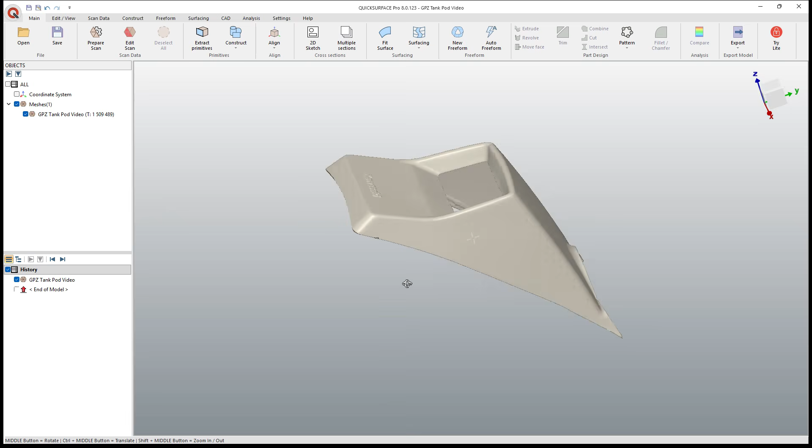Hey everyone, this is Matt with Learn Everything About Design, and in today's video, we're going to be using QuickSurface Pro to create a version of my Kawasaki GPZ tank gauge pod.

Now, we're going to start with a little bit of background on this project so you understand what we're doing and why. This is part of our GPZ build series, and this is an '83 Kawasaki GPZ 750. Back in the 80s, all the manufacturers were starting to experiment with new things. Kawasaki was one of the first to include a gauge on the tank. This was a fuel gauge, side stand switch. It had oil pressure. It had some other stuff in it.

So my plan for this bike has always been to build a GPS-based speedometer to go in this gauge pod, to also include the fuel gauge still, potentially the oil pressure light. This thing doesn't have a rev limiter on it, and when you would get over about 10,500 RPM, the oil pressure light would come on, and that was kind of an indicator of, like, you're getting low on oil or you need to shift or something like that.

Now, obviously there's a tach, or we're going to put a tach on the bike and everything like that, but it's just a sensor that I want to still include somewhere. So I'm going to be porting the oil pressure sensor. I don't really care about the side stand switch. That thing is gone. But I do want to include the fuel gauge.

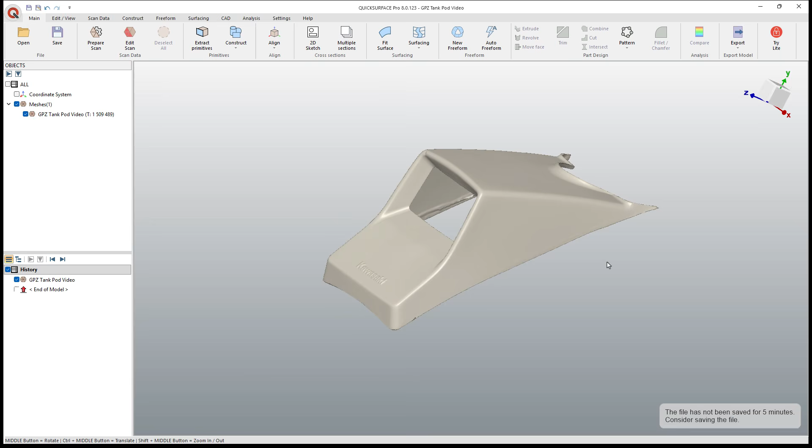And since the bike is sort of at a different angle now, when I was riding it with the factory gauge in here, it never was right, just because the tank was tipped so much further forward. So we need to correct that. We need to bring all these sensors in. The gauge that's in there is pretty big.

It's pretty bulky, but the display that I ended up getting is a Nextion display. I think it's the 3.2-inch Discovery series. And it is narrower top to bottom, but wider. And also, unfortunately, it is a touchscreen, but it's not centered. So the rectangle, the 55 by 80 rectangle, the display is not actually centered on that. So I'm going to have to work with that to make that happen.

Now, this project, unfortunately, involves a lot of different steps. So we're going to be breaking it up into many different videos and not just a single video like we have with most of the other parts. This is because I need to get all the inputs from the bike, which has not run in quite a while. So I need to do some figuring out on the resistance values for the fuel sender. I also need to get the Feather and the GPS wing for the Feather sorted out.

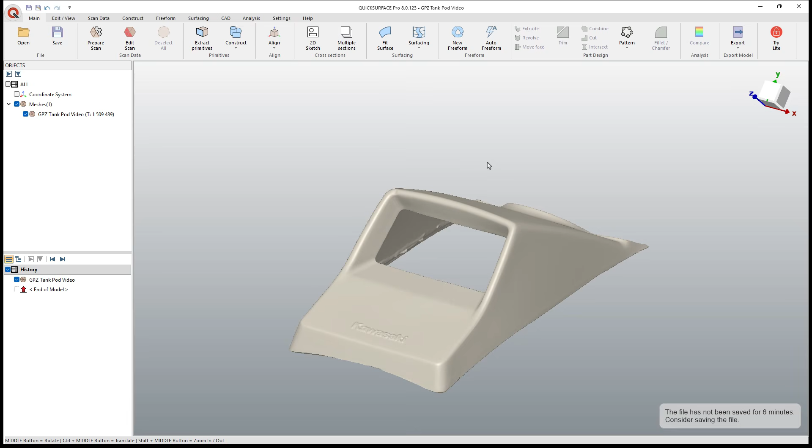I need to figure out if I'm going to try to keep the touchscreen display and what all I want to include in different gauges and things like that on the display, or if I want to seal it so that way it can actually have a little bit of protection from the elements, from the dust and the water and things like that.

So all that to say is we scanned this part in one of our recent videos looking at the Einstar 2. This has a scan on the outside and one on the inside. The part does have a gasket that was epoxied in place, so it's kind of messy on the inside, and there are a couple of holes in the scan, but we have a good enough scan here that we can replicate the part.

Now, I've actually already replicated what I needed and printed it and test fit it, and everything was fine. That's not the final version because I need to build a housing for the gauge itself, but I did at least validate that going off of this part, we can get something to work.

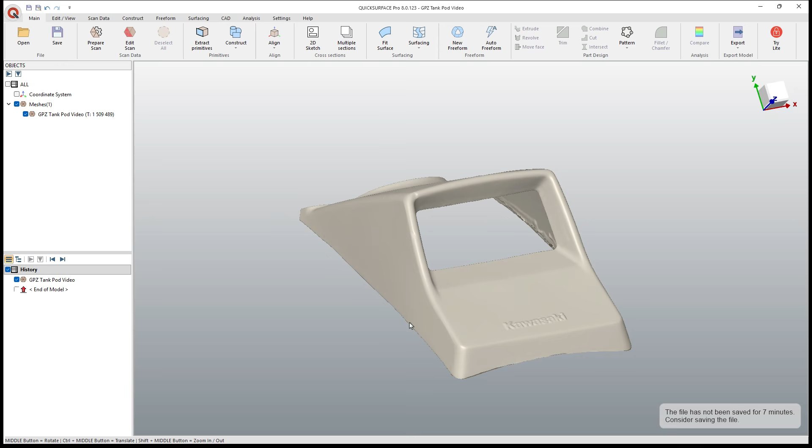There are a lot of different steps in this process that we need to understand. First of which is we're dealing with a plastic part that's over 40 years old. And it does have a broken corner, but other than that, it's in pretty good shape. But it is twisted. It is deformed left to right. So we're going to have to use some judgment, figure out what we consider acceptable.

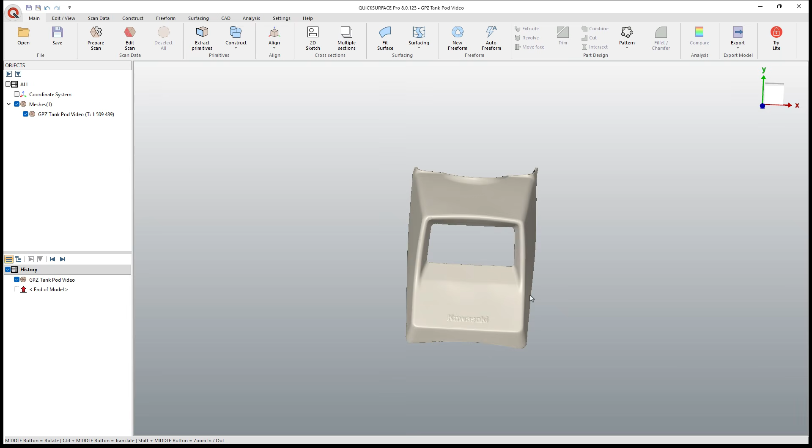Some of the features, like the little sharp parts on the back and the lip that's right here, I'm not going to build those because honestly, they're not needed. It doesn't come that close to a frame. They were just included as sort of a cosmetic feature. It's not something that I really care to replicate. So we're going to focus mainly on the intersection with the tank and then the general shape, knowing that after I design the gauge, I might actually have to make this thing a little bit bigger, but we can sort all that out later.

All right, so first step when we import something into QuickSurface Pro. Now I am using QuickSurface Pro because there are a couple of features in here that I think are helpful, and I will point them out as we go. You could do some of this with Lite or with Personal. There will be limitations into some of the features we look at. So I'll try to point those out as we go.

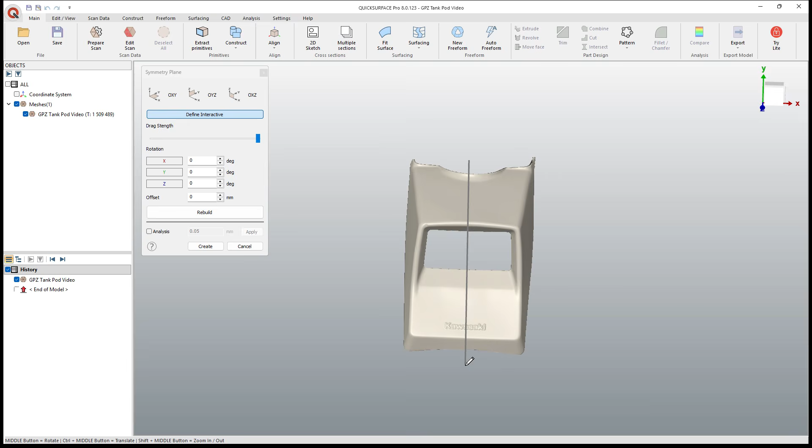So generally what we do is we draw a line, we dictate where we want that plane, and then we select rebuild. Now this is going to go through, it'll calculate, it'll try to analyze the mesh and figure out where the symmetry plane should actually be. And then once it has a good enough response, in this case, we can see the result, how that one corner is a little higher. We're going to look at the analysis.

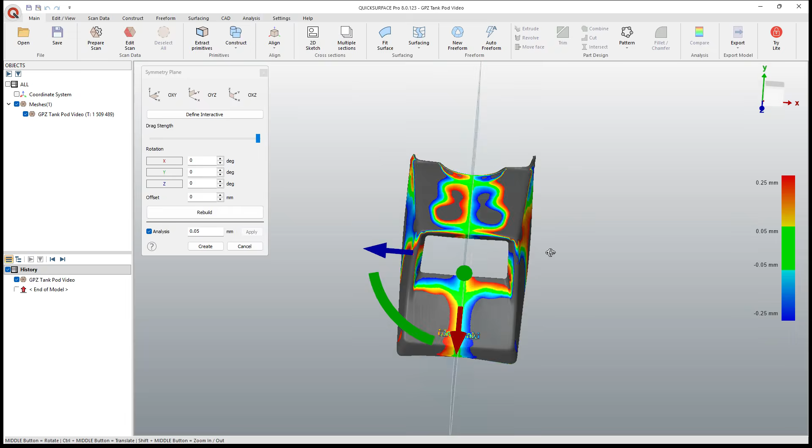And what I'm looking for here is essentially a very similar color bar left to right. Now, this is blue and this is red, which means this is low and that's high. Same thing over here, low and high. But you can manually adjust this if you want. So you kind of tweak it and try to get it closer and then rebuild it again. It'll use that adjustment, whether you rotated it or moved it around.

Also keep in mind the analysis is 0.05 millimeters, which is really, really small. If we change this to maybe a more acceptable number, 0.5, this is more realistic for this kind of part. We're not looking at a highly precise machined part, and obviously there's some noise in the scan data. That's something we have to deal with.

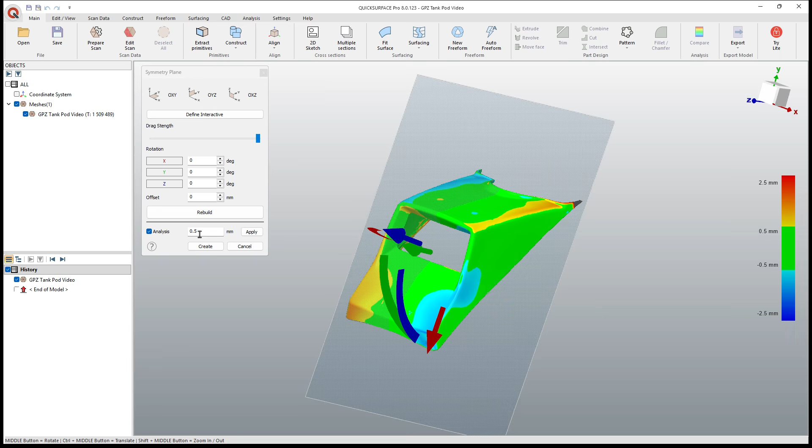But changing that analysis value to something a little bit more realistic, like 0.5 millimeter, now we can see that this is actually really close. We've got low spots and high spots here, low and there, so we can kind of see the twist. That's good enough for me, so I'm going to create that plane.

Now that we have this plane, I need at least one more that I can use to basically align this to the coordinate system. So I'm going to extract primitives. And if you are on a Pro version, then you can use this segments option. That segments option does not exist in Lite or Personal. And then I can just select this face and create a plane.

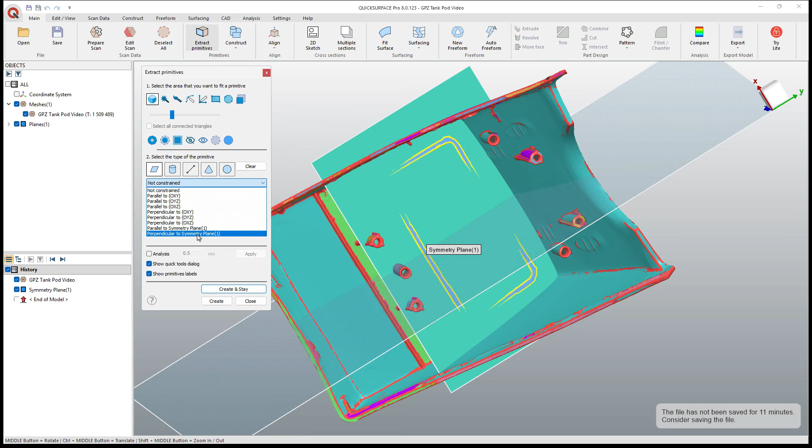Now, before I OK that, what I want to do is make sure that plane is perpendicular to my symmetry plane, and then double check the analysis. And you can see that looks pretty good. Everything's green. We're going to create that.

Now, one downside to this is we don't really have a good reference for XYZ orientation. So what I mean by that is this part sits on a gas tank and it's kind of sitting like this. The screen is pointing at the rider. None of the bosses are really pointing in the right direction. So we don't have another good reference for the coordinate system. So we're only going to use these two planes.

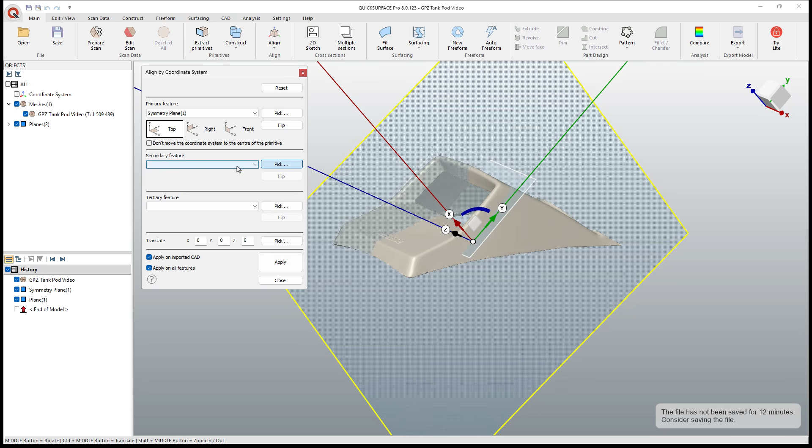So I'm going to go to align by coordinate system, starting with my symmetry plane. Then I'm going to go to my plane 1. Now I want to look at this and make sure X, Y, and Z are correct. I want Z to be pointing toward the rider in this case. And if we need to flip anything, we could do that. And then we'll apply. When we apply this, it'll apply it to the mesh and to all the features we created, which means the planes are going to rotate as well. And then we can close this.

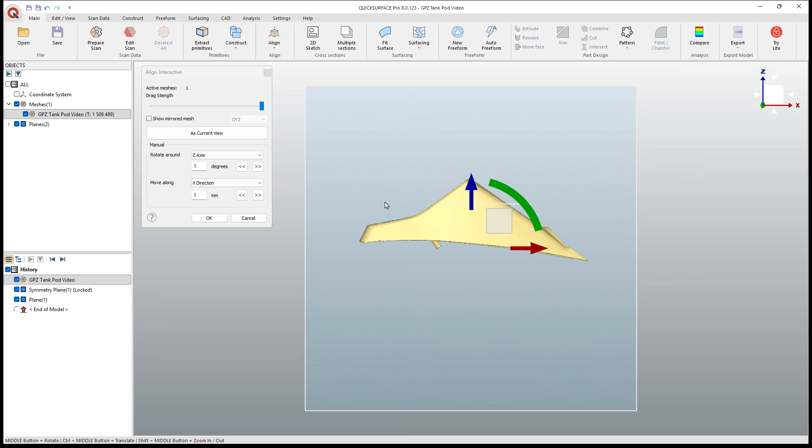But once again, if I look at this from the side, that orientation may not be exactly helpful for creating some features. So we can always go to Align Interactive, and we can rotate it until it would be roughly about how it would sit on the tank. A downside to this is there is no option to move the planes with us. So when we do that, that second plane we created is now basically meaningless. So I'm going to delete it. I'm going to rotate this around.

And I'm going to construct or extract another primitive. So once again, I'll click here, create a plane, make it perpendicular to my symmetry plane, show the analysis to make sure it's okay, and then we'll create that. I don't know if I need that. I mean, I will need it at some point. I don't know that I need it right now, but now we have that.

All right, if you're still with me, at this point, the next step for me is to change this 1.5 million triangle or polygon mesh to something that's a little bit more manageable. If this ever has to be exported to Fusion or another CAD program, we don't want to send 1.5 million triangles because it will slow Fusion down. Now, I've worked with scans up to 10 million triangles, and while doable, it's not exactly ideal. So the lighter you can make this, the better.

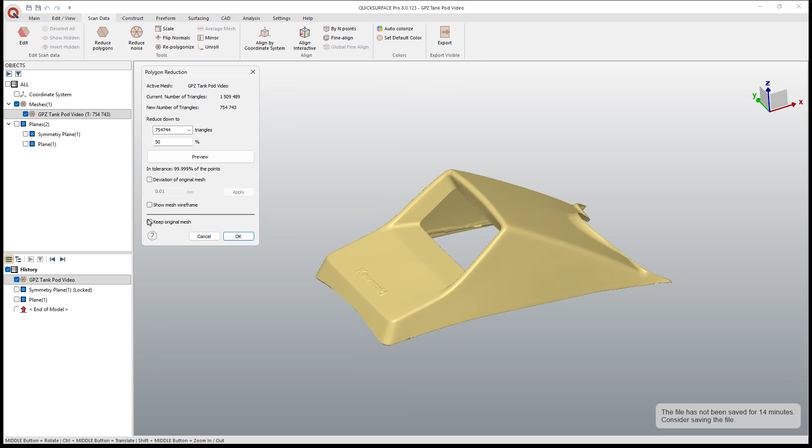So under scan data, we're going to reduce the polygons. Right now, I'm going to do 50%. We're going to preview this and check the deviation of the original mesh. You can see here, 99.999%. You can analyze it and see, well, there's really no area where it's not within that range. So we can go lower. We could say 25%. Now we're at roughly 370,000 triangles, 99.998. I'm going to go quite a bit lower, let's say 5%.

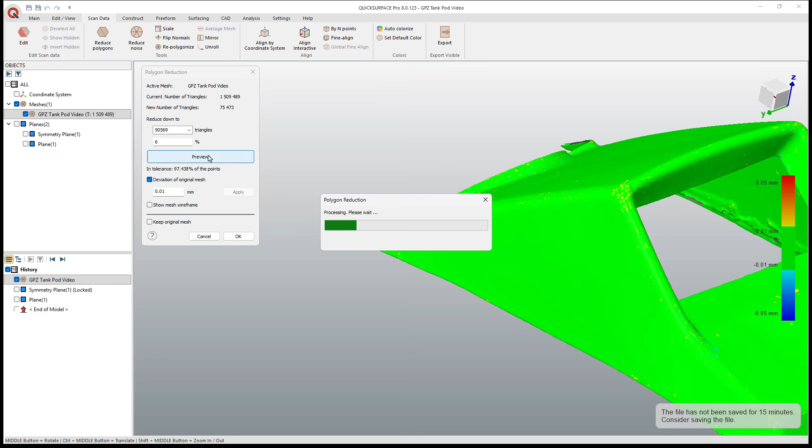And we'll take a look. All right, so now it's 97%. The areas where it's a little bit off are these corners. So you can see here, this might not be an issue at all. And so if you're okay with this, then you can run with it at 75,000 triangles instead of 1.5 million, or you can start to go up. So for example, let's say preview at 6%, we're back up to 99% accuracy. So you just have to make the decision what is okay for you.

Knowing this part is plastic and it's twisted, that 98, 99% is probably overkill, but we've gone from effectively 1.5 million down to under 100,000 triangles. I am going to keep the original mesh just in case. So I've got the original here, and then I've got what I'm going to consider the lighter version.

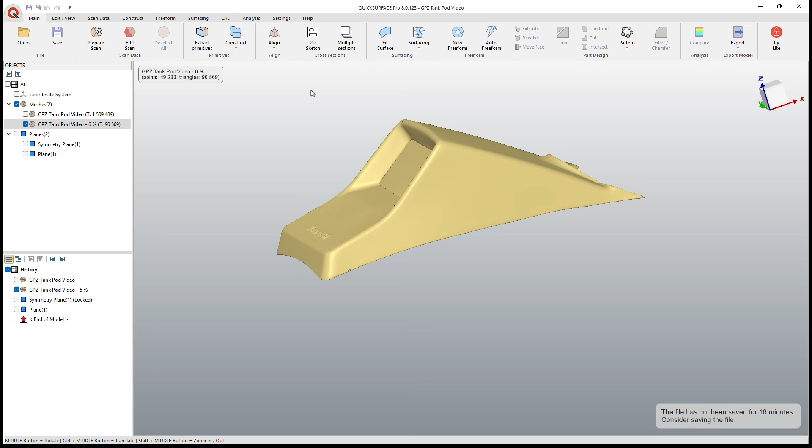But now we need to decide how to create surfaces. Now there are probably 5 or 6 different ways that we could do this. Fit surface, or using a sweep, fill surface, freeform, auto freeform, or extracting some sketches. These are all different ways that we can create this geometry. Let's go ahead and explore a couple, and I want to first start by going to my surfacing menu and selecting 3D sketch.

So the first one I want to look at, I'm going to create a path. This is snapped to the mesh. We'll create a path there, double click to end. And then I'm going to come from here. I'm going to begin coming up the mesh and double click there and say okay. So with this, what we're going to do is we're going to sweep this curve along this path, and we're going to show the analysis. This gets us pretty close.

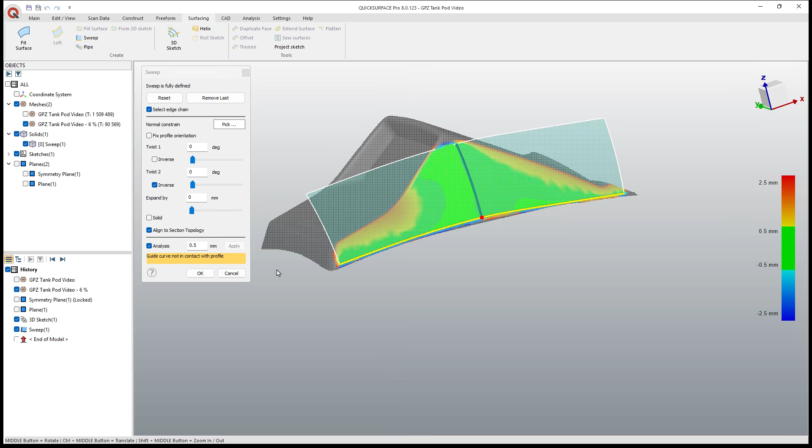You can see that it starts to fall away as it gets to this back corner and this front corner, but overall that surface is relatively close, and then we can extend it up and down if we want to use it. That's one method where we could use, let's say, the sweep tool. Generally, I would say don't use the sweep on a face as complex as this because you'll likely get a better result using other tools. So I'm going to select and delete that sketch. I don't need it. And we're going to create another 3D sketch.

The other method that we can use with these curves, and again, double click there. We're going to create a curve there. We're going to begin creating curves up here. Double click.

And we'll go down to there. So the other thing that we have is we've got what's called a fill surface. We can use this boundary. We can show the analysis. And we can even use the option to do on scan data. And so on scan data will snap to the scan data on the inside of the boundary that we created. If any of these boundaries were edges of, let's say, surfaces, then we could also use tangency or curvature continuity to control them. We're going to select OK and create that.

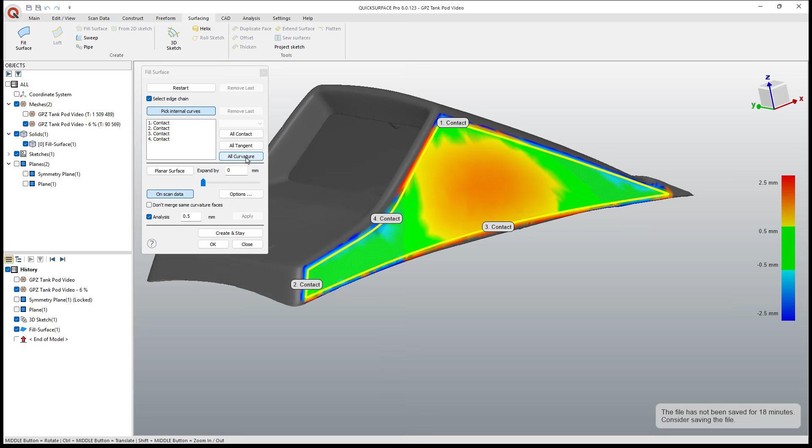And you can see it's a little bit low in the middle, but again, for the purposes of what we're doing, knowing that I'm actually going to have to change the shape slightly, it's OK for now. And then what we would do is we would select this and extend the surface. Now you can do these individually, either natural or linear, create and stay. I'm going to go ahead and take this one down below because we're going to trim them. We'll do the front edge.

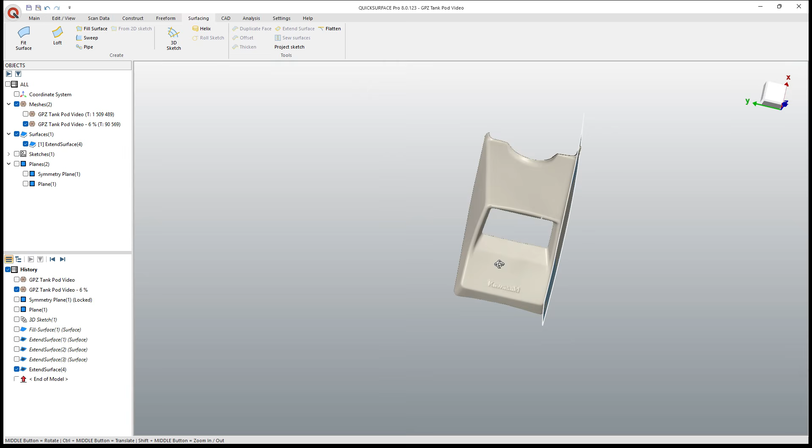If you pick the option to select edge chain, it'll grab the entire outside border, but that tends to get a little messy, especially with curves like this that are complex. But now we've got the right-hand side. Again, it's a little bit low in the middle, a little bit high in the backs, but for replicating this part, it's kind of bulged out. It's probably going to be fine.

Once again, this is a plastic part that's been in use for a long time. It's definitely seen a lot of sunshine, and it doesn't have the gauge screwed into it when we scanned it, which means that it's kind of a naturally deformed thing. We're going to end up mirroring that to the other side, even though we're going to end up making some modifications a little bit later.

All right. The next method that we have to create some surfaces is going to be with our freeform tool. So I'm going to use freeform, and I'm just going to begin creating a freeform shape on this back face here. We're going to turn on analysis. I'm going to select this inside edge here and hit S, which will split it in half. Do the same thing over here. And that looks pretty good.

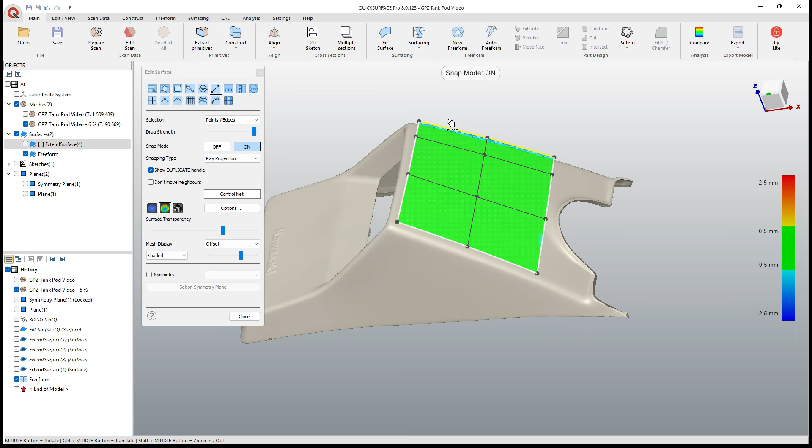Then I want to take extrapolate, noting that snap mode is on currently, but when we extrapolate, it won't snap to the mesh by default. If we start to move any of these, it will. So you do need to be careful here. A little bit low in those areas, but overall that looks like a pretty good match. So we can say, okay. So now we got a surface for the back.

Once again, we are going to make our own symmetry. So we're going to be trimming this stuff near the middle and then loft between them. But now we've got that top surface. On the front area here, we can use the fit surface option. Once again, on a Pro license, we've got segments. We can adjust this until we get that front as a single color. Click on it and create our surface.

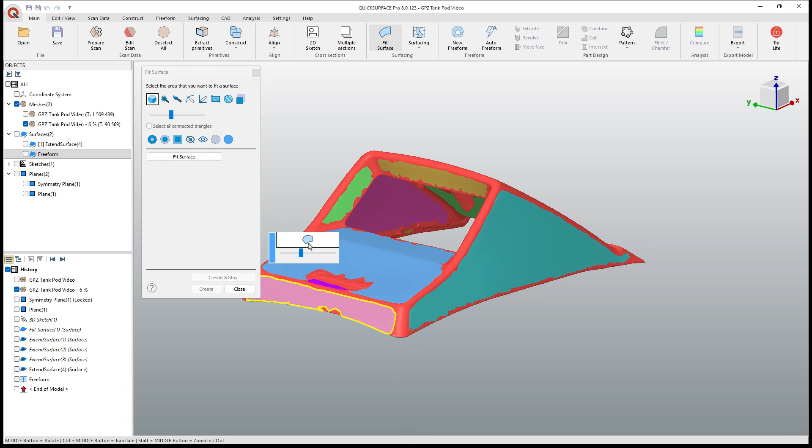You can always turn on analysis to see how close you are. It looks pretty good, and we'll create it. If we need to, once again, you can select these and extend them. I'm going to go ahead and just pull this upper section up, and I'll pull this lower section down, and we'll say okay. All right, so now we've got the side, which will mirror over. We've got the top. The next thing is to create this front.

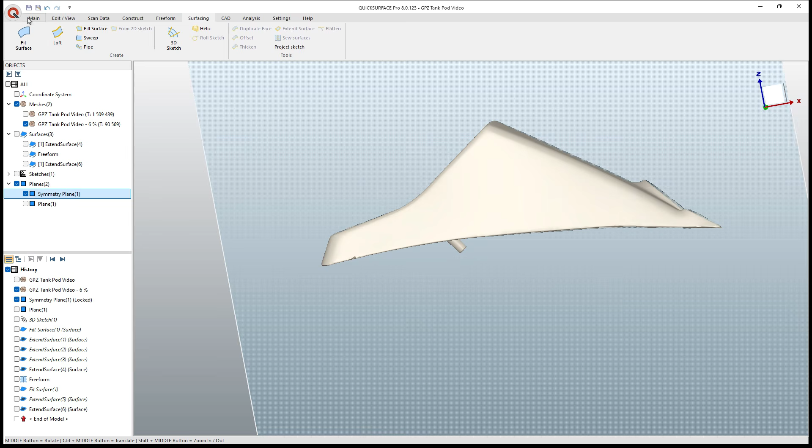Now remember, the gauge opening here is going to be different. We're going to have to create a new gauge opening. So I am just going to replicate this side profile shape. So I'm going to bring back my symmetry plane, create a 2D sketch. We're going to pick our symmetry plane. And then I'm just going to create this with lines. So I'm just going to come down to where I think the corner is roughly, and then I'll come forward.

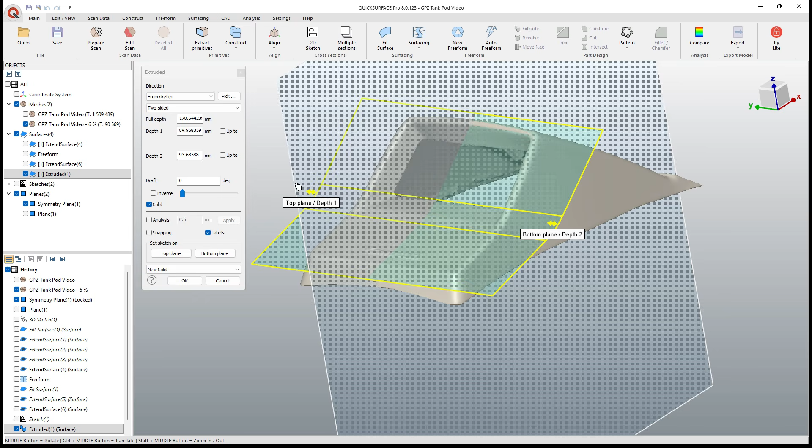And then I want to go to a corner treatment. I'm going to do a fixed fillet size. When I do a fixed fillet size there, it's going to add the dimension for me because it's automatically adding that dimension. So I can adjust it after the fact and get it as close as possible. So again, that looks pretty good. We'll say extrude, pull that out, and I'll hide the symmetry plane.

And then I want to take this surface, the extended surface here, and we want to mirror it to the other side. I'm going to use my symmetry plane. We can turn on analysis if you want to see how close it is. Again, not too bad. Again, a little bit of a high or a low spot right in the middle, but overall that looks okay. So now that we have all of these surfaces, we can select them all and use trim. Now there is an automatic trimming feature if you are on the Pro license.

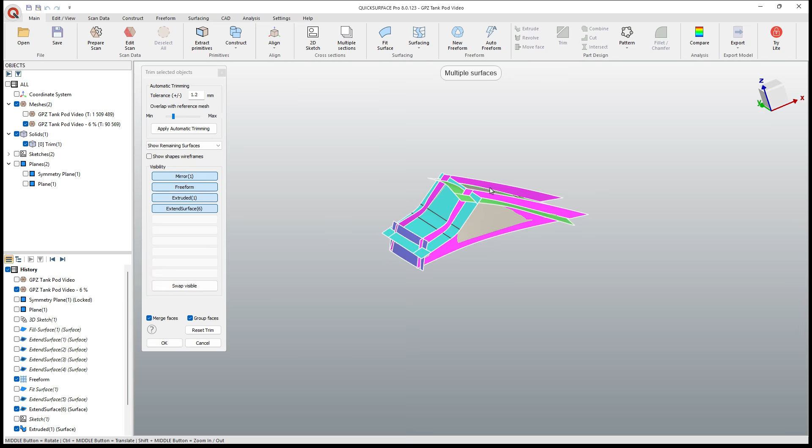As soon as we get too many surfaces and as soon as it gets a little bit complex, I've actually had some issues crashing my system, probably running out of RAM. So I generally manually select these. It's just a little bit safer for me because I haven't saved the design yet and I don't want to run into that issue. So let's go ahead and get all those corners and that corner as well.

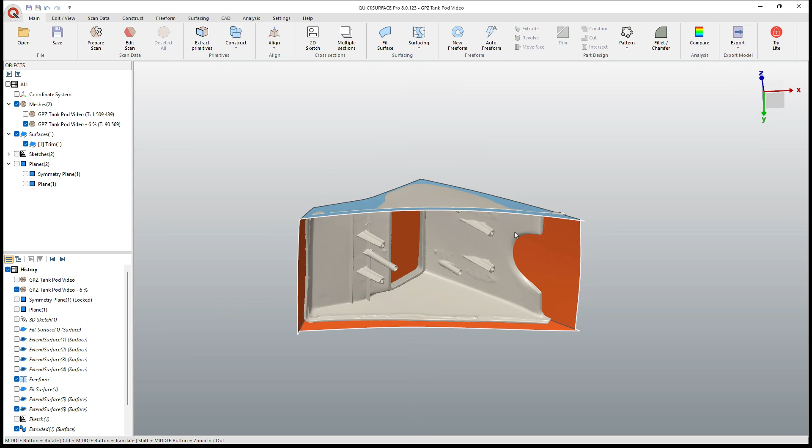All right, merge faces is on, so it's going to join this all into a single surface. All right, well, that's the basic shape. The next thing that we need to do is we need to trim the bottom and also trim the back, so the opening for the frame. While we don't need to necessarily have this feature here where it kind of bumps up, we could create it. Again, it's really just a cosmetic thing because it's nowhere close to the frame on the bike.

And so it's really like, I don't know, 2 inches away, 50 millimeters away. So it really doesn't need to be there. So I'm not going to worry about it for what we're doing. But now I have to figure out how to cut the bottom shape. And so again, this is twisted. You can see that side's a little bit lower. So we're going to have to sort of make a decision how we want this to work.

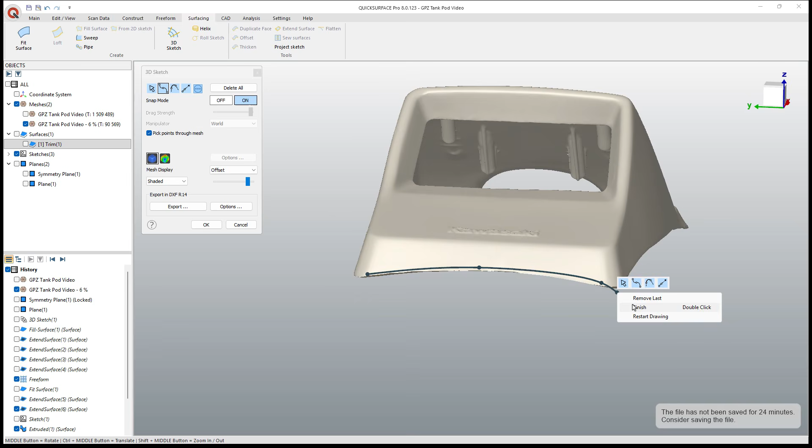So what I want to do is go back to surfacing. I'm going to create a 3D sketch on the front of this face. And we'll finish that. If that looks pretty good, what we're going to end up doing is creating a surface, and then we're going to move that surface to the right location. So I just want to roughly match the shape. I say roughly because it's not a perfect scan. That corner is omitted a little bit, so I just want to get it close.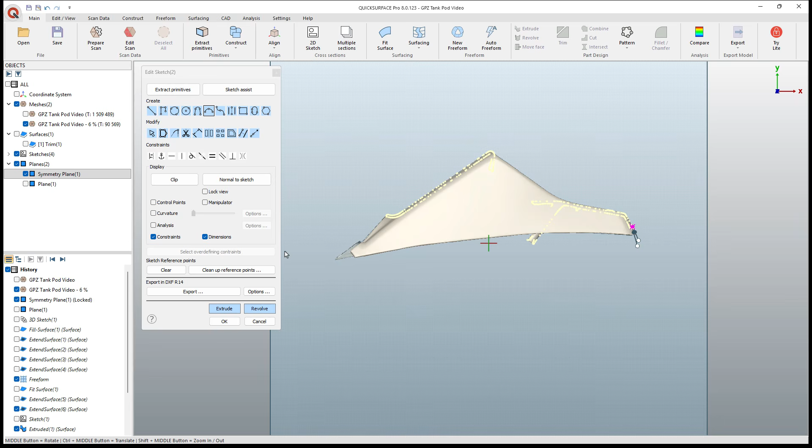We also have extrapolate, so we can take these endpoints and drag them out. If we're happy with it, we'll say okay. And then we want to create a 2D sketch on the symmetry plane. So we'll create a 2D sketch, pick our symmetry. And now I need to create a curve that matches this one here. This one is actually fairly close to just an arc. And so what we can do is bring it over here. And again, just try to get it close.

Remember the backside, you can kind of see it here. The backside's a little bit higher because this thing is twisted. So that's about the difference between the two. And then I'm going to move this up. So I'm going to do this with offset. And where that pink dot is, is where the curve we created is. I'm not worried about snapping to it for right now. I'm going to turn the original one into construction. And then we're going to say okay.

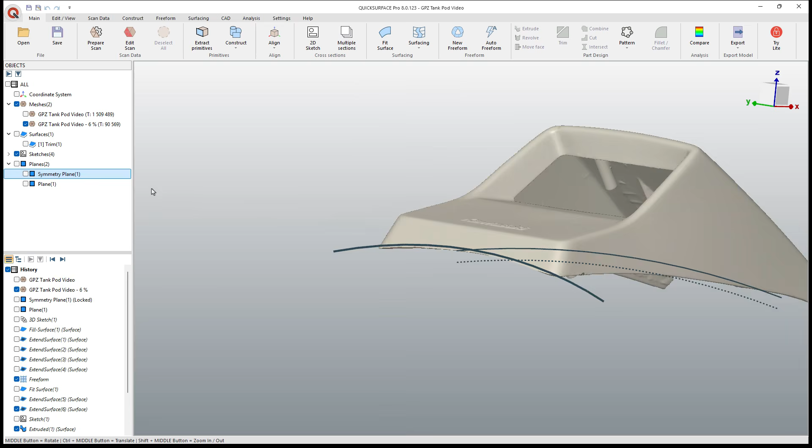So now on our surfacing tools, we've got sweep. I want to sweep this along this curve. It's going to tell me that it's not in contact with the profile, but it's still going to let it happen. And it actually looks pretty good on all the sides. We'll say okay. And then we'll bring back our other surface here. All right, so we'll select both of those. Go to trim. And I'm actually going to remove the inside completely here.

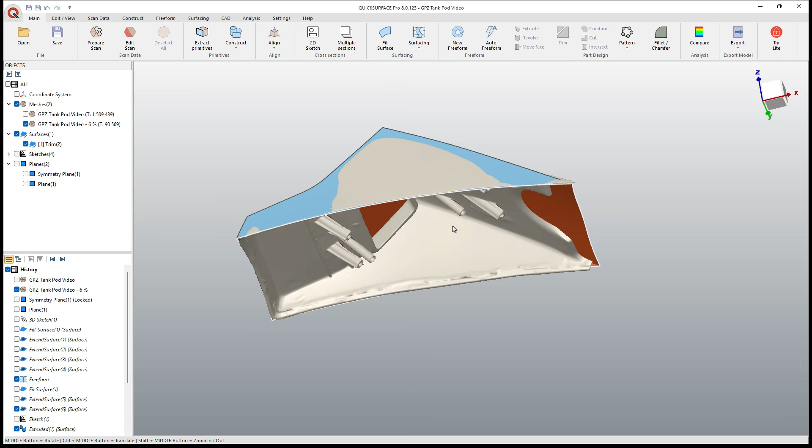And we'll say okay. Once we thicken this thing into a solid, I'll probably recut that bottom edge. But for right now, I just want to work with it in roughly the right orientation. The next thing that we need to do is sort of cut out for this shape back here. Again, it doesn't need to be perfect. So I'm not extremely worried about matching that shape. It could probably even go straight across and still fit the bike just fine, but we still want to try.

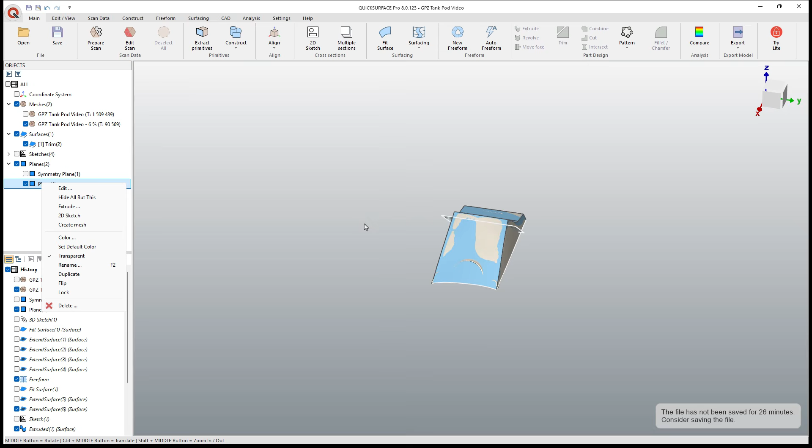So what I want to do is create a plane, and under construct, we've got plane from current view, plane along path, and all these different options. So what I would say is if we take a look at, let's say, this plane right here, what I want to do is create a plane that's probably perpendicular to that one. So we're going to select that plane, go to construct, and then we're going to say plane.

And actually, you know what? We could probably just cut it from the top. That would be a little bit more simple. We can define it interactively. We can rotate it to an axis or anything like that. But honestly, cutting straight up and down is going to be fine for us. Why make extra work when we don't need to? All right, so let's create a 2D sketch. We'll create. I'm going to hide the surfaces.

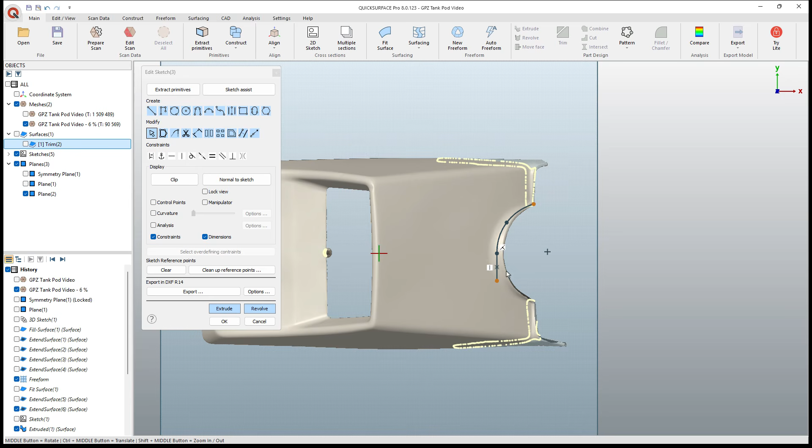And now I want to basically create this cutout. Because we don't know exactly where the symmetry is in the shape, here's the origin. I'm going to make essentially a line there. And then I'm going to create a tangent arc from there down to, let's say, there. That point right there, that intersection, we can click on this and make it tangent. This one that's already vertical, construction. And then this other line here will kind of come down at an angle, and then we'll come out this way.

I want to do a little bit of a fillet in the corner, so we need a corner treatment. This is going to be too large. So probably 5 millimeters is going to be better. So let's reset that to 5. And I want to do the same thing to that corner as well. So we'll set this one at 5.

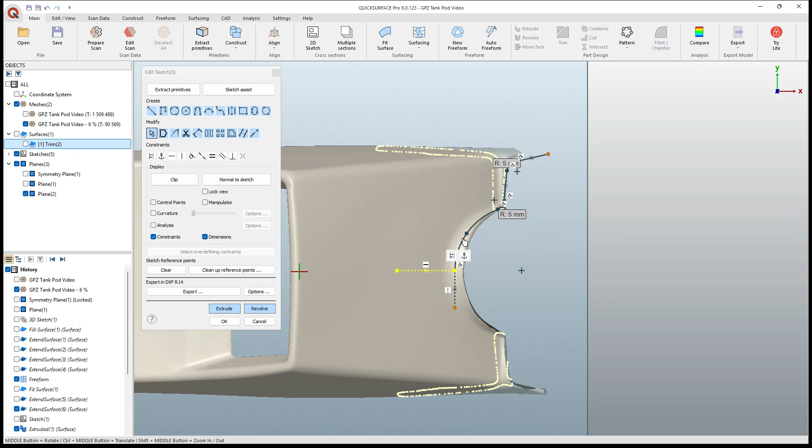And we need a line for the mirror. So that line is going to be construction as well. So we want to select that construction line, and then we want to select all of these curves. So I'm holding down Shift, grab all those, and we'll need to have a construction line in the selection, and then we can use the mirror selected entities option.

We're going to extrude that. Make sure it goes all the way through the surface, hide our plane, and bring our surfaces back. I don't need to see the mesh right now either. All right, everything looks okay. We'll select both of those and trim.

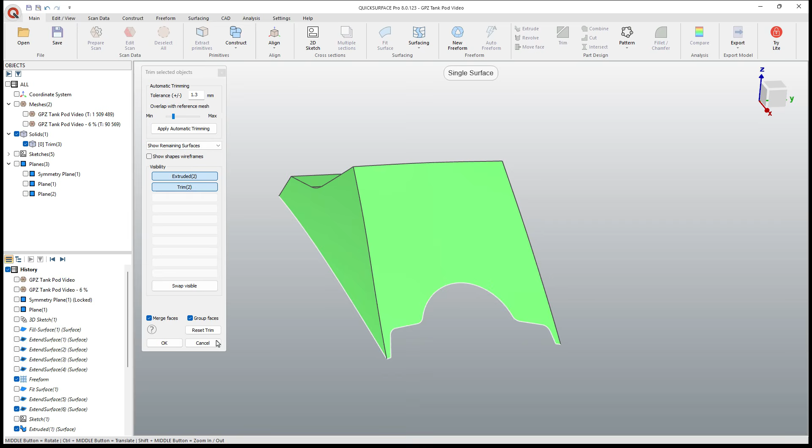All right. The next thing that we can think about doing is either rounding the corners, or before we get that complex, we can split this thing and mirror it so that we know that we have perfect symmetry. And honestly, this front face right here and this back face are the only two that are potential problems. This side and that side were mirrors of each other, and this was just an extrude, so left to right, it's fine.

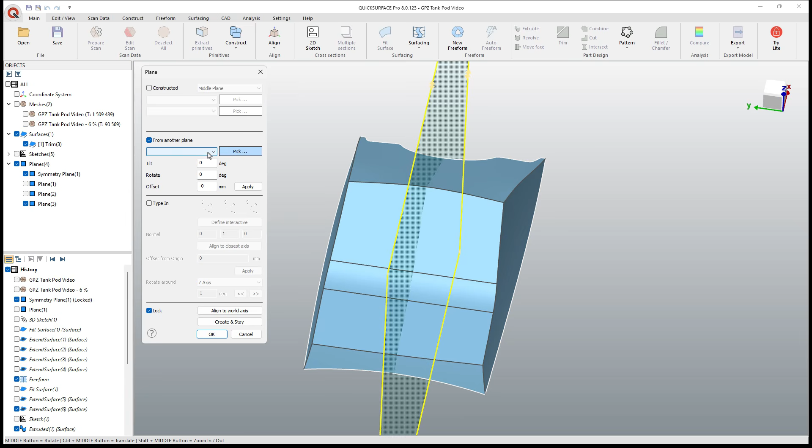But in order to make sure that this thing does actually have true symmetry, let's take our symmetry plane and create an offset plane. So we select plane, and then we'll do from another plane, pick our symmetry plane, and then just pull it off to the side. I'm going to go about 11 millimeters and say okay. So now we'll select our surfaces and that plane, and then we can trim everything off on the other side.

Now we can use our symmetry plane to mirror this entire body. So once again, we'll go back to our CAD tools, mirror, and we'll pick our symmetry plane and we'll say okay. Now that we've got both sides, we can loft between them. So we'll select loft. We're going to select our curves. Again, we haven't added any fillets yet, so this should be fairly easy.

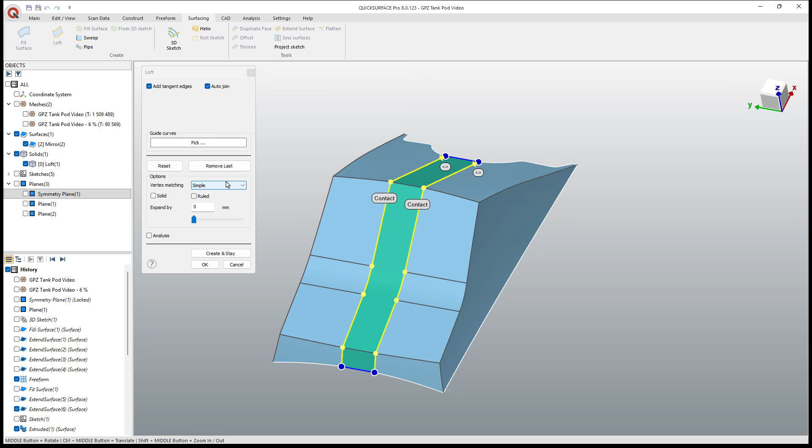And we want to make sure these are tangent so that it does follow the curvature that we cut on the front. It does follow the curvature on the back, and everything is smooth across. You can, again, turn on analysis if you've got a mesh visible and take a look. And there we go. That is our basic shape. Now that we've got the basic shape, let's go ahead and add some fillets to it.

So this is really handy for us to think about the order of operations. For example, this fillet right here, originally it blended into the shape. Again, we're not doing that. But this fillet right here and the fillets on the front, those were likely added before. And then this one around the gauge kind of rolls all the way around.

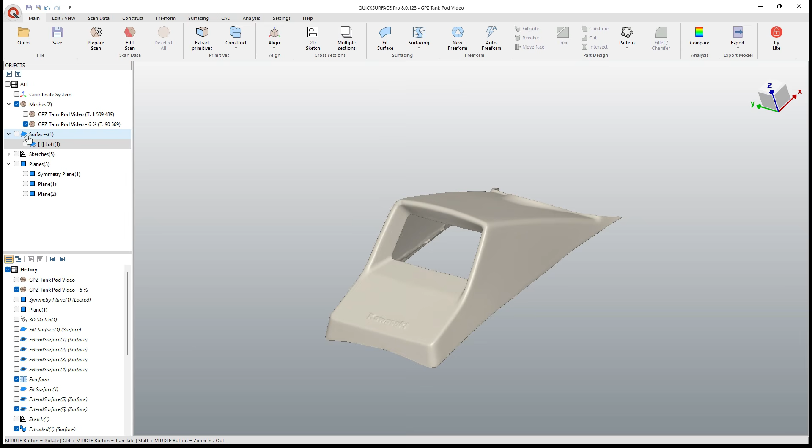So what I want to do is add a fillet to this edge and this edge, turn analysis on, and then go down to where it's green, or the most amount of green there. We'll create and stay. We'll do this on the front edge. Again, analysis is still on, so we'll go until it's mostly green. The scan itself or the part is a little bit twisted, so I'm going to focus my attention on the original side because that's where I based everything off of. And we'll create and stay.

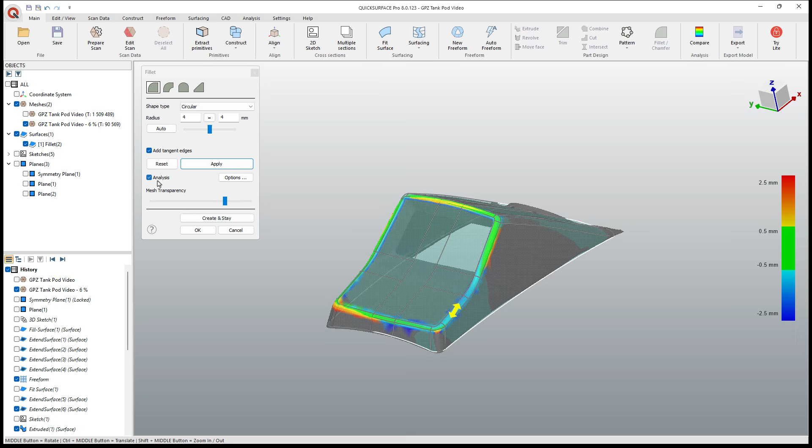And then this one here, we want to start dragging that until it's mostly green. Again, I'm looking for everything that is on this side because the part is twisted. So I want this to be green down here. That looks okay. Now, if you want to, you can use standard numbers. For example, if this is likely a 4 millimeter fillet, using those round numbers is not going to hurt anything. And then we'll say okay. So now that is the basic part. Obviously, we need to create the opening for the gauge.

You will have to decide when you're doing stuff like this if it's easier for you to do here inside of QuickSurface, or if this is something that you would want to do in a CAD program, depending on how you want to define it. For me, I always forget to save, so I'm going to go ahead and save this. I've done a lot of testing on this part, again, for the 3D printing and so on, so I'm just going to carry that naming convention.

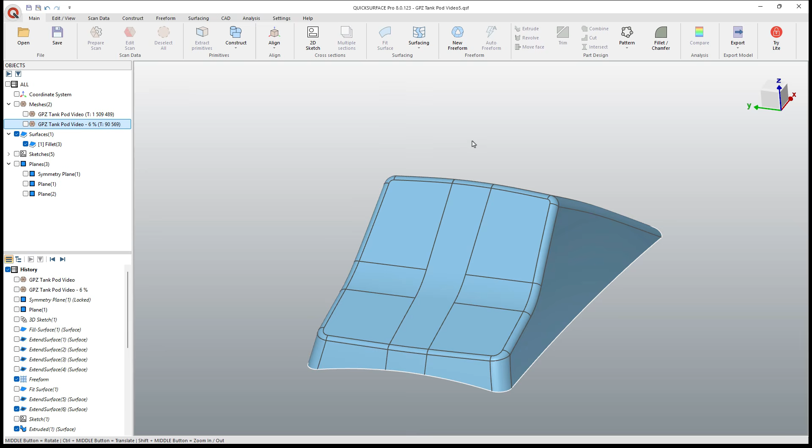All right, if you're still with me, this took roughly about 20-25 minutes. Doing it without narration probably takes about 10 to get to this stage, maybe faster. If you've done this part multiple times, you could certainly do it quicker because you don't have to experiment. But I think overall, this is a pretty good result relative to the original. It matches the shape. Somebody would see this on the bike, and unless they were an expert in the Kawasaki GPZ, they would probably never know it wasn't a factory part.

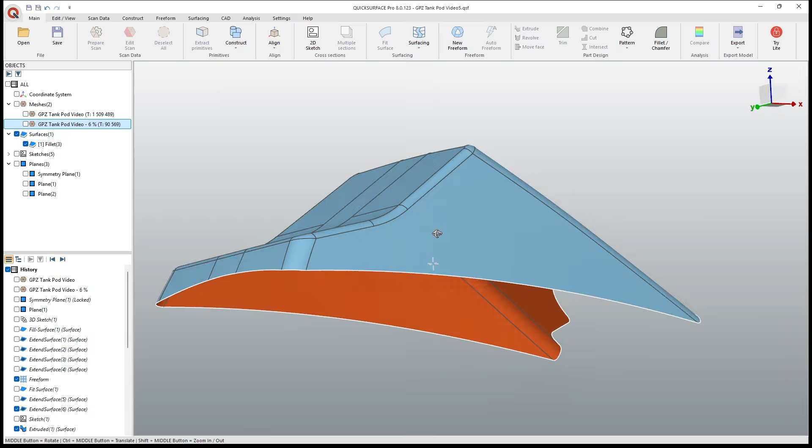But now we need to make the opening for the gauge. The way that we're going to do this is I want to essentially create the profile on that face, and I do have that plane that we created, so we're going to start by creating a sketch on that face. And because the part is symmetric about the origin, I'm going to start with a vertical line. This is just going to be a vertical reference line. I'm going to convert it to construction. Now I need to create a rectangle that is 55 tall by 80 wide. This is going to be the opening for the physical LCD.

Again, this is likely going to change because downstream, I need to account for various things that haven't been designed yet. I need to design a PCB that's going to hold the feather boards as well as a voltage regulator. The voltage coming from the bike needs to be regulated down to 3.3 volts or 5 volts at the highest. And it also needs to be sort of smoothed out and conditioned. So there'll likely be some capacitors in there. I also need to account for all the other inputs: the oil pressure, the fuel gauge, anything else that I might want to include.

Obviously, the GPS speedo is all going to be on board, so there's no speed sensor or anything like that that has to happen. But because of that, I'm going to actually export the surface before I actually cut anything out, or at least a duplicate of it. But for right now, I want to make that rectangle. So I'm going to go to a rectangle, and I'm going to start by just dragging the rectangle out. I want to add a dimension. It's going to be 80 millimeters wide, and it's going to be 55 tall. So we can kind of see what we're working with.

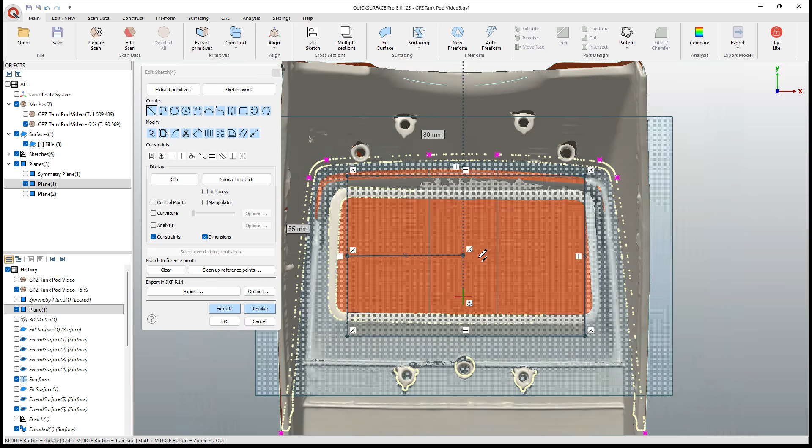And then if we take a look at our line, we've got these midpoints here. So I'm going to drag a line out to here, and let's zoom in to make sure we're getting it right. A line to there and out to the midpoint. These lines right here need to be horizontal. So this one horizontal as well. And then I also need them to be equal. So I want to select both of these and make sure that they're equal lengths. That will center my rectangle left to right. They also need to be construction because I don't actually need them. So the rectangle is centered left to right, but it can still move up and down.

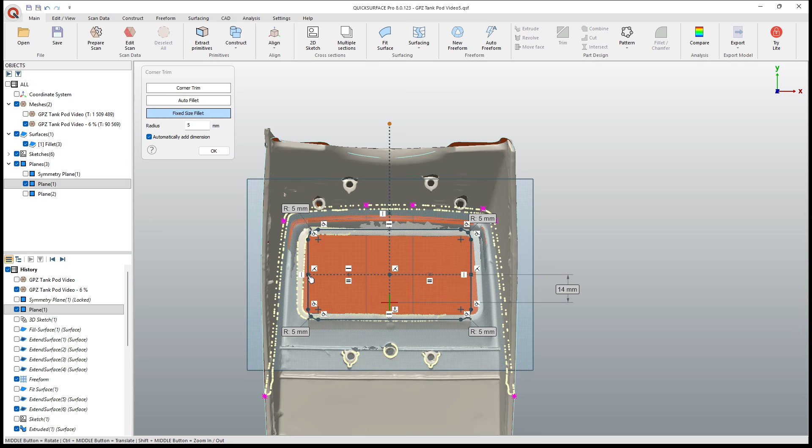And I need to decide where I want this to be and then apply a dimension. So let's say from the origin to that point, let's just come up with a number. Let's just say 14 millimeters. That's relatively close. When we begin to use these curves for, let's say, a loft, it would be really helpful if there was a consistent fillet on the corner. So let's say 5. As we do this, it's going to shift around, but if we added constraints to everything else, the equal constraint, horizontal, going from the midpoint on the left to midpoint on the right, it should work its way back into the right orientation.

It is a good idea to double check that your dimensions from top to bottom didn't change, and you can see here that they did. It's now 45 when it should be 55. And then from left to right, it should be 80. It adjusted because we started to add these fillets that ended up dropping it down 10 millimeters. Part of this depends on where you place those dimensions. If you dimension the lines, they're actually getting shorter, so you will end up reducing your overall height based on the radii that you use. I'm going to say, okay, this is the starting point for the loft. Before I get any further, I want to export this solid, or the surface, I should say. So I'm going to go to this Q menu. I'm going to say Export Model.

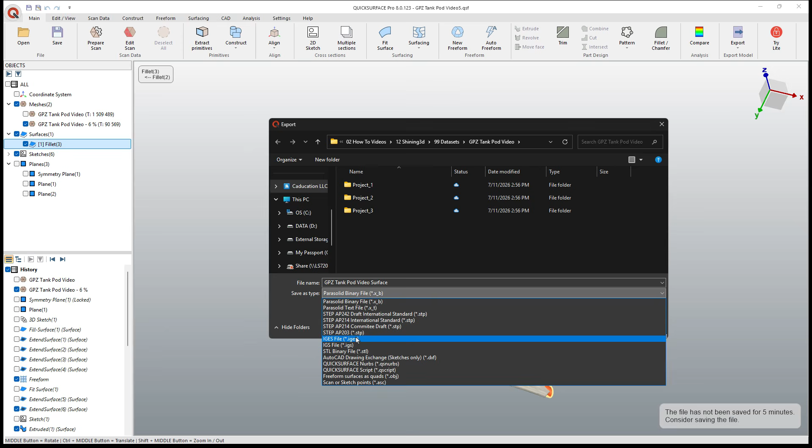And I'm going to go ahead and call this a surface. It can be a parasolid file. It can be a step file. It can be an IGES file. It really depends on what you want to do. There will be some cleanup that has to happen after the fact. So, for example, you may need to stitch all these surfaces back together to make one single surface. That's, again, completely fine, but now at least I have that model that I can use.

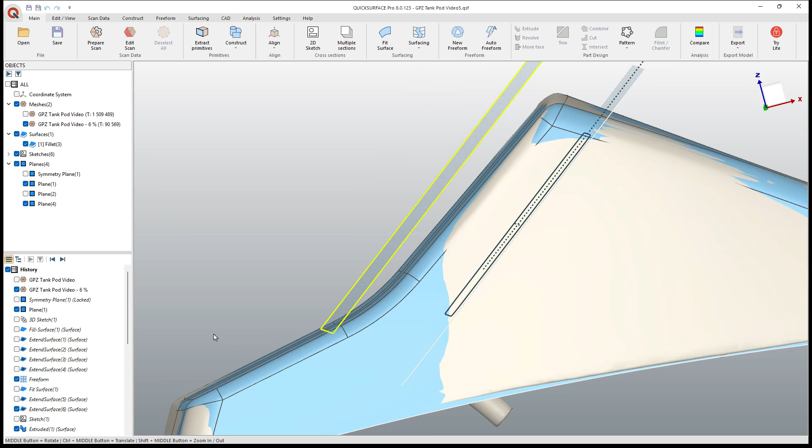The next step is for us to create an offset plane from this plane here. So again, construct plane from another plane. It's going to be plane 1, and then we need to pull it where we want it to be. I want it to stay relatively close to this face. And basically what I'm going to do is I'm going to loft out to another shape. So I'm going to say okay, and then we'll create a sketch on that plane.

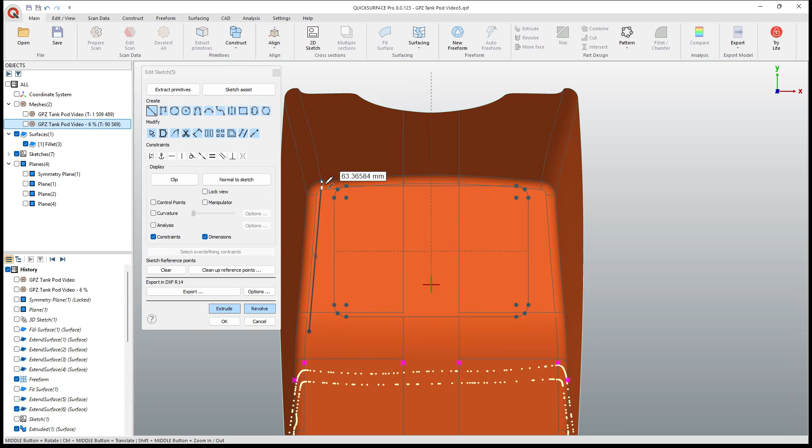If we need to, we can rotate this around, go normal to sketch. Yeah, I guess it's going to look at it from the backside. That's okay. All right. So now let's hide the mesh and let's focus on our surface. So right now we're going from this shape out to essentially this shape right here. So we need to kind of match this. I'm going to do it with lines, and we're going to come, let's say, up to here. I'm trying to stay roughly parallel. This isn't a straight line, but close enough is going to work.

And then I want to create an arc. Actually, you know what? Let's do one more thing first. Let's create a vertical line that is construction. And then we can select that construction line and this line, and then we can use mirror. So now if I create an arc, I can go from that point to that point and create that. On the bottom, this can be a straight line. It doesn't necessarily have to be an arc.

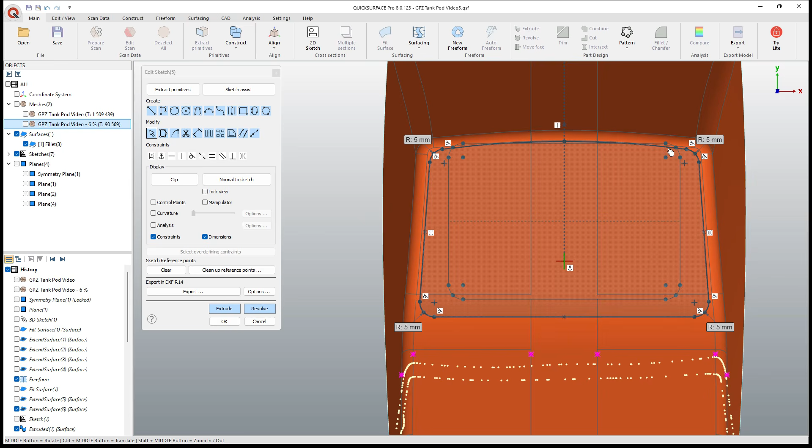And then we likely want to do some corner treatment. So 5 there and 5 there. Because there are no dimensions or constraints right now, it's not going to kind of go crazy, but you do still want to apply these rounded corners. And the main reason is because if we're transitioning from one shape to another, we want to make sure that we're using those sort of rounded edges.

As I look at this, I think that I actually want to move this one down a bit lower. We can do that by going back to the last sketch, Sketch 4, selecting edit. And instead of 14, let's change this to 13. Actually, let's go down to 12. And so basically what we're doing is we're shifting it down. We can see the next sketch, and we just basically want this to be inside of that arc. I know it's hard to see, but we'll get there.

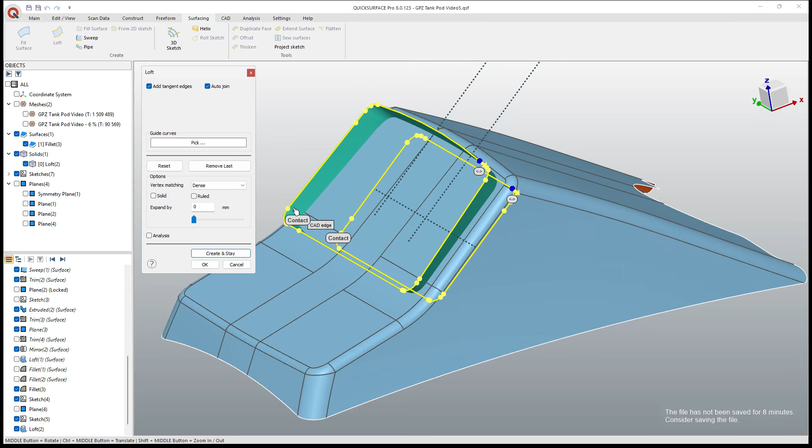All right, surface, loft, we're going to go from this curve to this curve. It's likely going to want to twist. If it does twist, the best thing that you can do is you can change the vertex matching. Let's hide the surface and try to get it so that there's no twist. The other thing that we can do is we can create a 3D sketch, and we can create a straight line. Oops, cancel. Let's do a 2D sketch. This will probably be a bit easier.

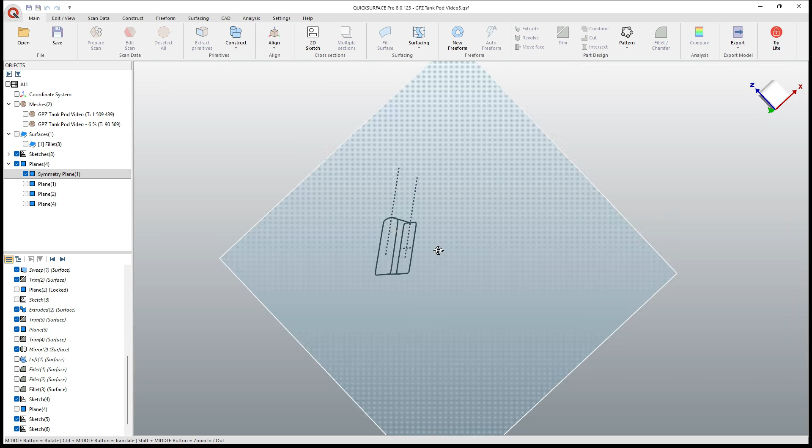And we'll go on the symmetry plane. And this will give us these pink dots where it intersects. So what we want to do is we want to basically snap between those dots, and we'll do the same thing down here. And using those dots will allow us to align as we're lofting. So back to surfacing. We're going to loft from here to here. And for guide curves, we want to pick a guide curve, and that should automatically get all the corners to look a lot better. We don't really need the bottom one. If you select it, it'll be fine. It'll probably work fine without it.

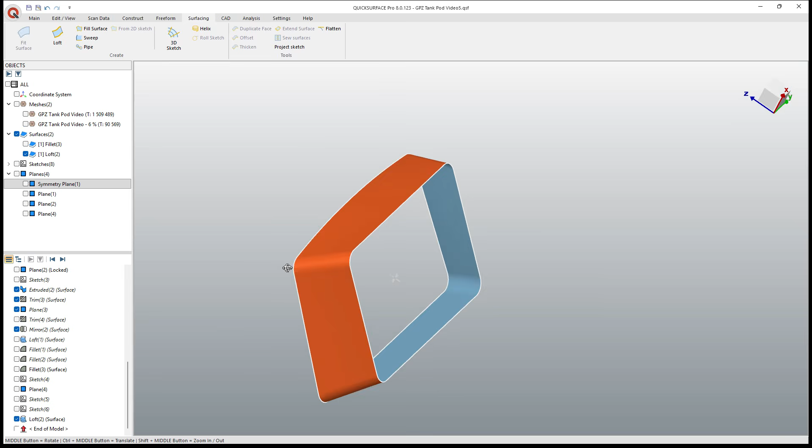And we'll say, okay. All right, so there's a little bit of twist in there. I don't really like that. I'm going to go back and edit the loft. And I'm going to remove the last. So I think that looks better. It's not twisting. Yeah, it's a better result. All right, and so now we have this surface, which we want to fill this opening. It's going to be flat. And then we want to take both of these and we want to trim them.

Oops, I didn't select them all. Let's try this again. Sometimes when you go over here to select in the tree on the objects list, it can be hard to get all the selections, but that looks okay. All right, we'll say okay. That'll join them together, and then we can add a fillet on this corner.

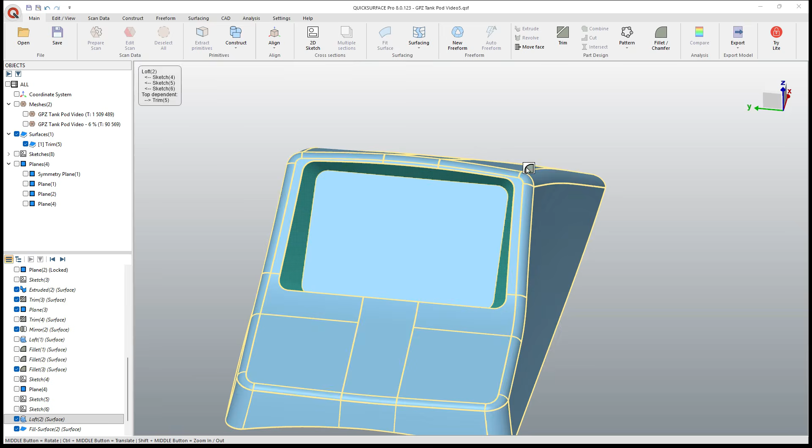So this is going to be a relatively small fillet, maybe right there. I'm going to go to 1 millimeter just to make it a nice round number, and we'll say okay. So if we look at the original, obviously the original gauge was shorter in the vertical distance, so it's tapering in more. It was about the same width. You can see that it's a little bit different on the sides, but it's fairly close.

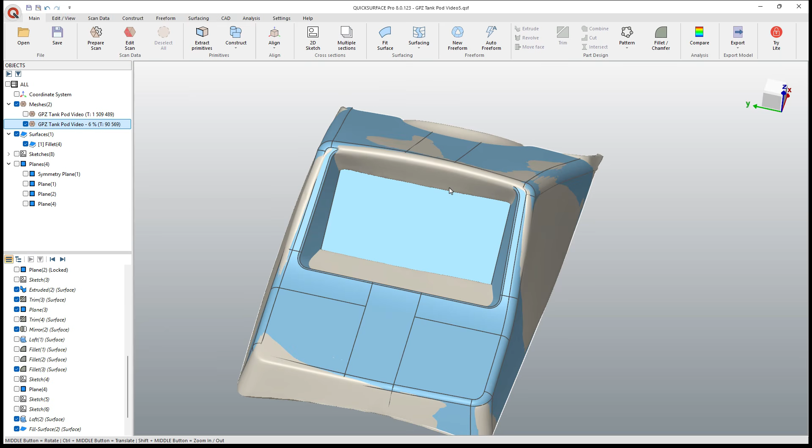But the big difference is, again, it's kind of top to bottom. We're dealing with a narrower and a wider gauge overall, and we're going to have to use this as a bezel. So I think the final shape works pretty well. I'm going to thicken it now. And we'll need to decide which direction we want to go. Remember that this is going to be about 2 millimeters thick. So if I set this at 2

and maybe go the other direction, we can see that we're basically taking what we did, which matched the mesh, and we're going outward. Part of the reason for that is because I need more room on the inside. So I need to go that outward direction to make that happen. I'm going to say okay. And now I've got my solid part.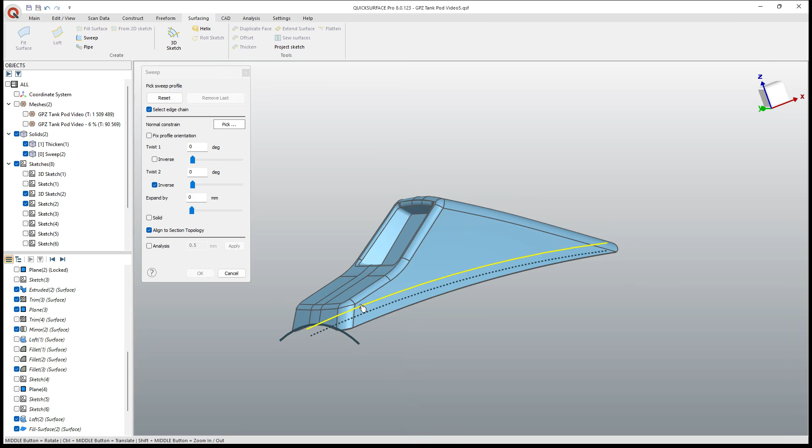Now, the last step for me really is to go back to those sketches. And let's see, we don't need the last couple. We don't need that one. We basically need these two. So what we're going to do is we're going to sweep this along that again. And then we want to cut the solid. So actually, you know what? I keep thinking about this more and more every time I do it.

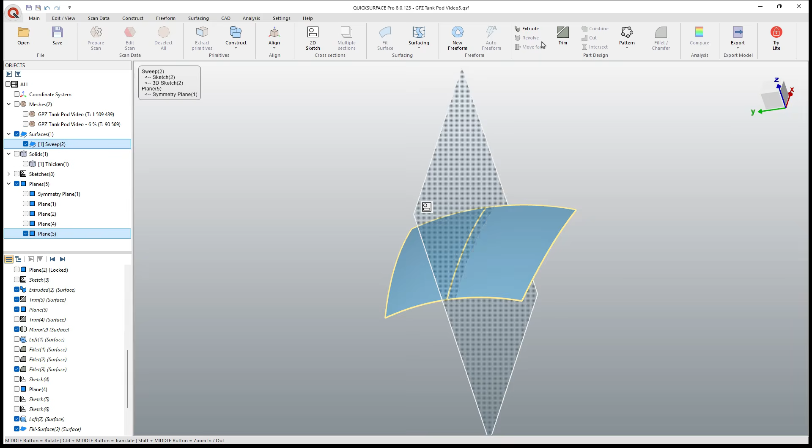So we're going to take that surface. We are going to split it with our symmetry plane. We're going to take our symmetry plane and we're going to create a new offset plane. So we'll go from symmetry, we'll come this way, we'll say okay. And then we'll select our plane and the surface and we'll trim. So the main reason that we're doing this is because we want to mirror this to the other side and ensure that everything is mirrored left to right.

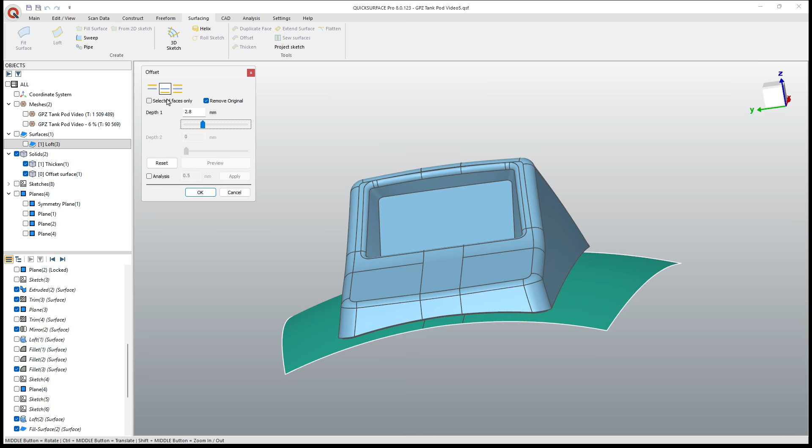So we'll go to CAD, mirror, select our symmetry plane, and then we'll loft between them. Go from there to there, make sure that they're tangent. And now we can take that and we can cut the solid with it. The other thing that you might decide to do is offset that upwards just a small amount. So maybe we'll go the other direction. We'll go up. We just want to make sure that we have a nice clean cut. So let's go up about 2 millimeters and say okay.

And so then we can select both of those and we can use trim. You can also use the cut tool. I find the cut tool to be a little bit trickier than using trim. I use trim for most everything, but cut does work as well when you're trying to cut a solid body. But this leaves us a pretty clean edge to work with, as opposed to the thickened version, which is going to be normal to the curvature.

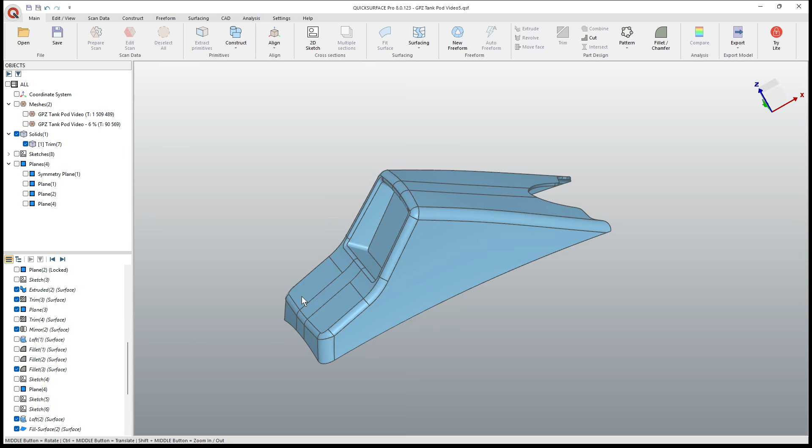All right, a couple more steps in this process. One is save. I never save often enough. Two is I need some references for the screw bosses. I don't need the three that are used to hold the original gauge. What I need are going to be the references for the metal brackets that hold this to the tank. So what I'm going to do is I'm going to extract primitives. I'm going to use the magic wand. Let's drag this up a little bit.

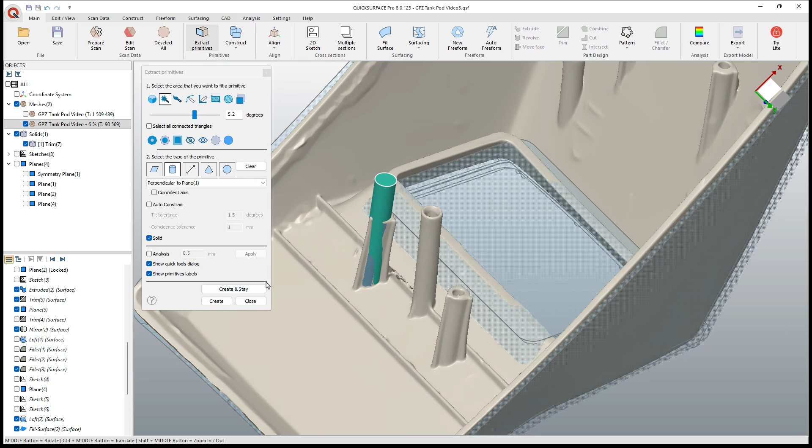And basically what I want to do is I want to create a cylinder here. So we'll create a cylinder. That cylinder, I think, should be perpendicular to plane 1. It's going to be close enough. It doesn't need to be perfect. We'll create and stay. I'm only creating them on the one side. We'll grab that. We'll create a cylinder. Once again, perpendicular to plane 1. And we'll select create. Then I want to drag these down.

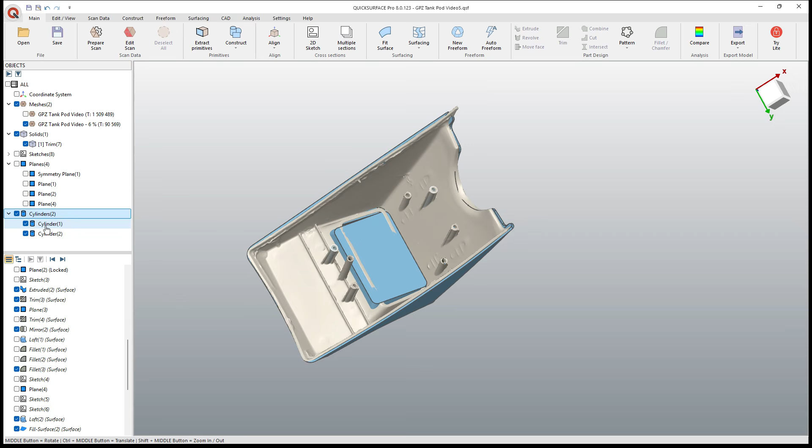Depending on the geometry that you're dealing with, you can hold down control and snap to the mesh. This part is not really something that requires that sort of level. But essentially what I'm doing here is I'm creating solids that are going to be references when I send this entire thing out to my CAD program. I'm going to have those references for where those need to be, and I can mirror them across to the other side.

The cylinders are shown with opacity. They're transparent by default, but you can change that. And then when we get it into CAD, we'll just mirror that to the other side. Any mounting bosses that we use for the gauge itself, those are going to have to come.

I have actually started designing a housing, but honestly, it's a little bit of a waste until I design the circuit board that's going to hold all the components inside of it. The housing is going to need to account for that. And while I could just create something that was rectangular like the original, I need to ensure that the GPS antenna actually does have visibility.

The feather wing that I have for this does have a UFL connector on it, so I could use an external antenna, but I already have the board. I'm already building the housing. This thing sits on the tank, so I just need to account for it. That might mean that the display itself is going to be in its own housing.

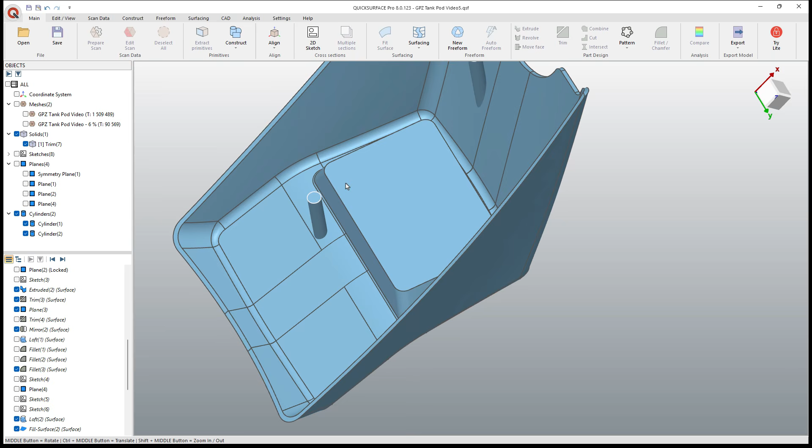There may be a second housing that puts the GPS antenna here or potentially here, because there is room between the tank and this area, so it would certainly be beneficial to have that GPS antenna either there, or let's go ahead and zoom out a little bit, or up in this area. There's loads of room. Underneath this part, the tank is actually open to the frame right there, so there is a lot of room underneath this.

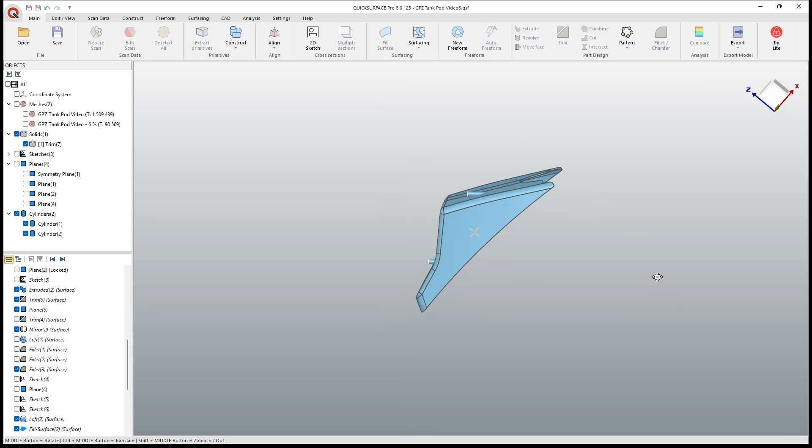So I've got plenty of room to play with. I just need to make sure that it fits within all of the mounting bosses I need and that it does have the correct visibility. So we're going to have to just work on that. But at this stage, I'm going to go ahead and save this again.

And I'm going to go to export model. This should include the cylinders. Let's see, with cylinders. And I'm just going to go ahead and make this a step file as well. And I also want to export the mesh just so I have it. So I'll right click, export the mesh. And we'll just call this aligned.

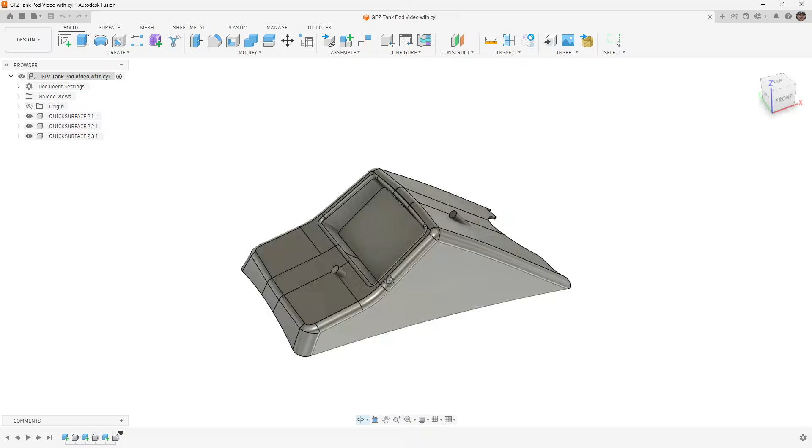All right, when we get it open in Fusion, we've got cylinders that are their own components. So this was exported as a step file. Each cylinder is a solid body, so we can deal with those if we want. And then we've got the solid body for the gauge. So I'm going to rename this gauge pod, and I'm going to drag this up into the top level.

I'm going to call this cylinder 1. I'll call this one cylinder 2. And I'll drag this one up and this one up as well. We'll remove these components. And then now we've got the gauge pod and the cylinders.

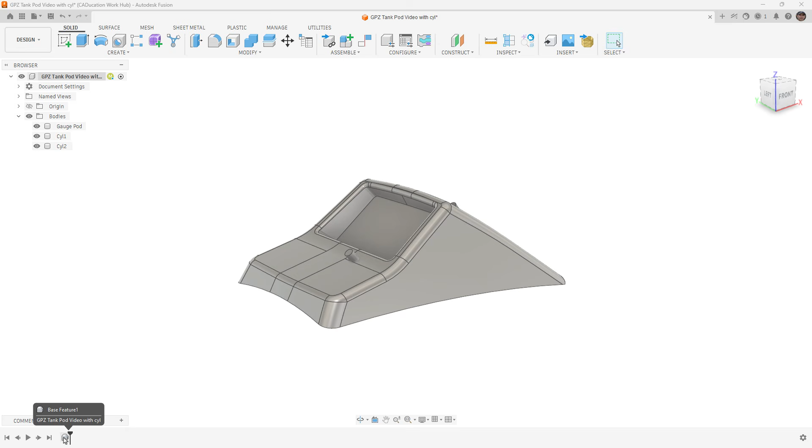And so from here, what I'm going to do is right click and I'm going to go to direct modeling, which will take the history away. Then I'm going to bring history back. So that gets rid of all of the removing components and moving things around.

At this stage, I'm not worried about adding these or joining these cylinders because really they were just going to be a reference for creating a new boss, because this thing is going to be 3D printed, at least at the start. I might actually have this thing vacuum molded. I just need them as a reference plane. And so I'm not too worried about combining them and getting rid of the rest.

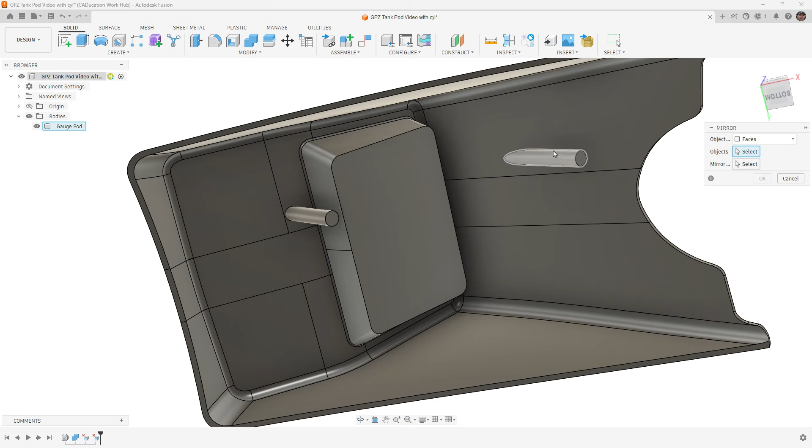If you wanted to, in Fusion, it's fairly easy. If we want to combine these two cylinders, after they're combined, I can just select and delete this stuff on the other side, and it actually will patch it pretty easily. We could have done that during direct modeling, and then I can go to mirror faces, and I got features, mirror faces. We'll take these and we'll mirror them about that plane.

Oh, that one didn't seem to take for some reason. Let's try that again. All right, and so now those are in the right location for the metal tabs that are used to mount this thing to the bike. So the way this thing works is it's actually mounted to the tank when the tank is removed, and it has just two metal brackets that are right there.

So I think this thing for right now is done. As I mentioned, I still need to design the gauge. I actually have a version of that right here, and I printed it and everything fits. So we're just going to have to come back to that. I'm going to need to do a little bit more work before I record anything on that.